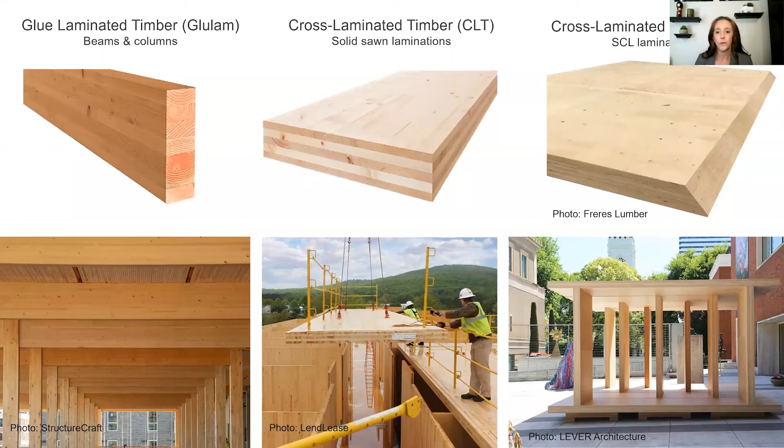So today, I'm here to discuss with you the mass timber revolution. So mass timber is a very old concept that has become new again with the advent of technology and modern design practices and code changes. For those of you who are unfamiliar with what mass timber is, I'll just go over it very quickly. So glue laminated timber, many of you are probably familiar with. You may have this in your own home, or it has been in the roof of residences or commercial facilities that you've been in. So it is essentially dimensional lumber laminated together in the form of beams and columns.

Cross-laminated timber is the buzzword lately, and it is also 2x dimensional lumber laid out in sheets and laminated together with glue, and each layer is perpendicular to the next layer, and this allows for strength and structural stability. Another form of cross-laminated timber can come by utilizing wood veneers. So mass plywood panels is an example of this, where you take essentially what looks like very large plywood and secondary laminating them together, also adding to the strength and structural stability. So when we talk mass timber, think very large pieces of wood.

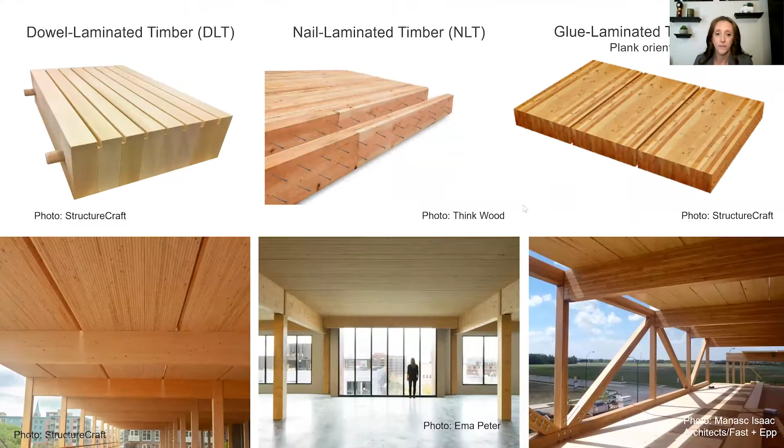Dowel laminated timber is dimensional lumber laid on its side and held together with hardwood dowels. This is often done in the factory and comes out as a finished product. Nail laminated timber is probably the very original mass timber and the very original dowel laminated timber. It is essentially dimensional lumber laid on its side and held together with mechanical fasteners such as nails. This can be done in the factory or on site. Glue laminated timber is a larger version of the glulam beam and column laid on its side and can be utilized for floor and roof decks.

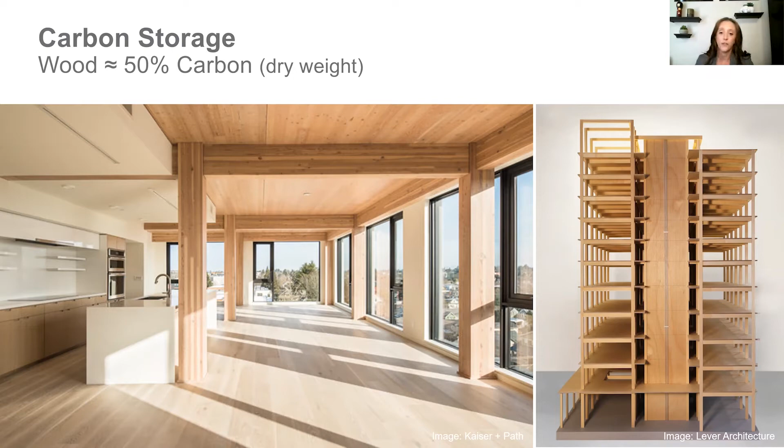Trees, yes, trees. Exposing wood can connect us with the trees from which they are sourced. After we've all been in quarantine and had a very interesting year, much of which might have been spent indoors, we are all thinking about biophilic design and how we can bring the outdoors inside. There are a tremendous amount of benefits to using wood in biophilic design.

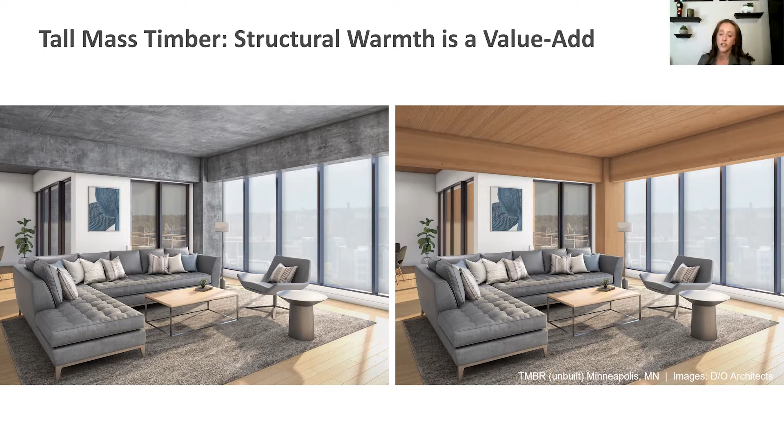As you can see here, exposing the timber as both the structure and the finish is a feature that many developers, occupants, and design teams are attracted to. It provides a warmth of structure that does not otherwise exist with other building materials.

Labor availability and labor shortages have plagued the construction industry for years. Mass timber projects regularly see significant reduction in the size of the crews needed to install these projects. That can help with some of the challenges projects face and make a project in timber definitely more feasible.

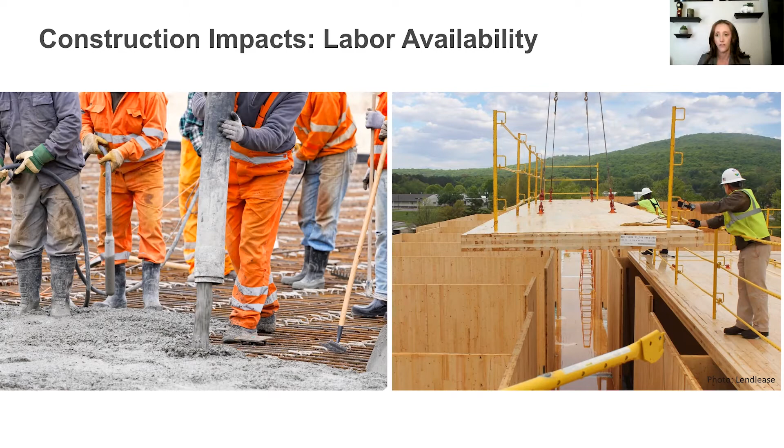Here's a screenshot of a schedule study that was done on a 12-story mass timber tower in Seattle. So it was determined that building this tower in mass timber would shave 5 months off the construction schedule as compared to the same building built in post-tension concrete. So we regularly hear that there is a 25% schedule savings that is realized across the board on mass timber projects.

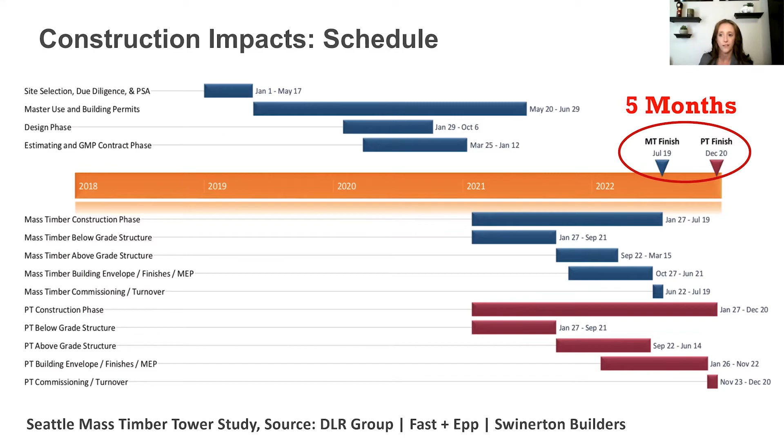So facilitating growth, how can we ramp up the adoption and acceptance of mass timber? So it starts with education and changes to the building code. So the International Code Council issues a new building code every 3 years. So the current building code is the 2018 building code. Many jurisdictions and states have not yet adopted that version.

For example, Idaho is largely using the 2015 International Building Code, but that is okay because mass timber was officially recognized in the 2015 International Building Code as a structural building material. However, come 2021, there are some exciting changes with regard to wood and mass timber specifically. So in the 2021 International Building Code, they're going to be incorporating some tall wood provisions.

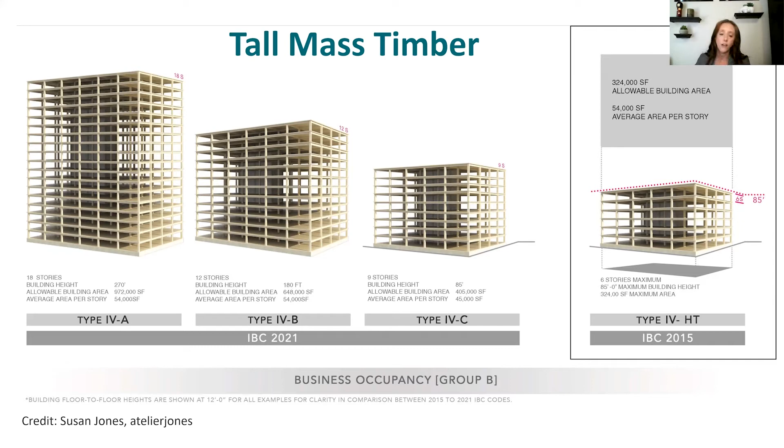And what this does: wood is currently only allowed to be utilized in a structure up to 6 stories in height. So in 2021, wood, specifically mass timber, will be allowed to go into buildings all the way up to 18 stories. So it is broken down into 4 different types. And with each step of the way, there are code provisions that will have to be adhered to. And a lot of that would have to do with how much of the wood can be left exposed.

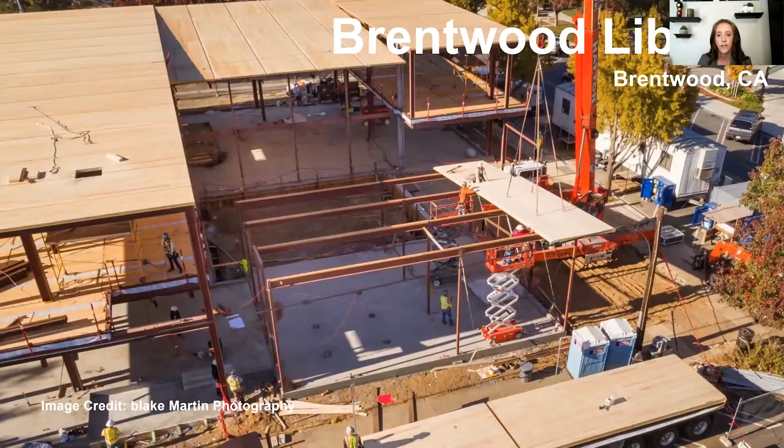Here's another library. This is located in Brentwood, California, and it is a 2-story library where they used CLT in the floor and the roof. And there's actually a second building on the campus, a 1-story auxiliary building where CLT was used in the roof as well. And one thing I'd like to point out is that this was the second project utilizing mass timber for this design team. And they only used CLT in the roof of their first project.

And what we're hearing a lot is that design and construction teams tend to dip their toe in the water with regard to utilizing mass timber. But once they've done it, they're eager to incorporate it again and more of it in subsequent projects. They find the material both fun and versatile and easy to work with.

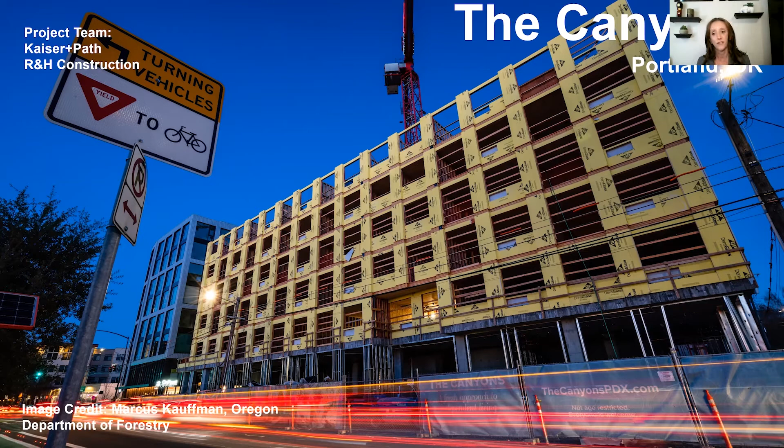This is the Canyons, a 70-unit apartment building in Portland, Oregon. It is 4 stories of wood over 2 stories of podium construction, and this project is currently under construction. This is a unique project because it has an emphasis on senior living. The goal is to be 100% ADA accessible in a downtown urban living environment.

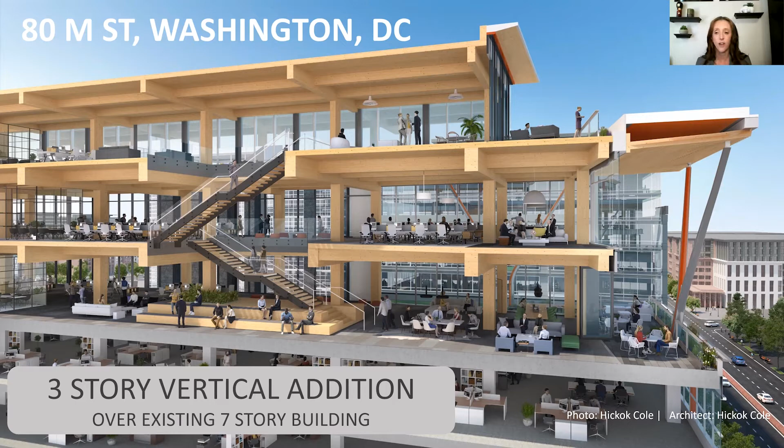This is also a very unique project. So one of the benefits of mass timber is it's relatively light in weight as compared to other building materials. So sometimes when you must expand, you must go up. So here is a building in Washington, D.C., of which they have added 3 stories of mass timber construction on top of an existing 7-story concrete building. So this is currently under construction.

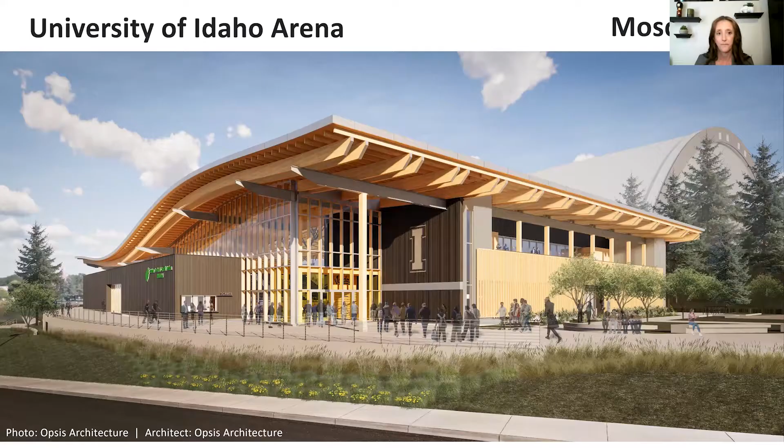This project, you might all be familiar with, is the University of Idaho Arena right here in Moscow, Idaho. And I won't go into too much detail on this project. Dennis Becker is joining us and he'll go in great detail. So this project is a 66,000 square foot arena that will finish construction in the summer of this year, and it is currently well under construction.

So with that, I want to thank you for your time, and I'll turn it over to Dennis to talk more about the University of Idaho Arena.

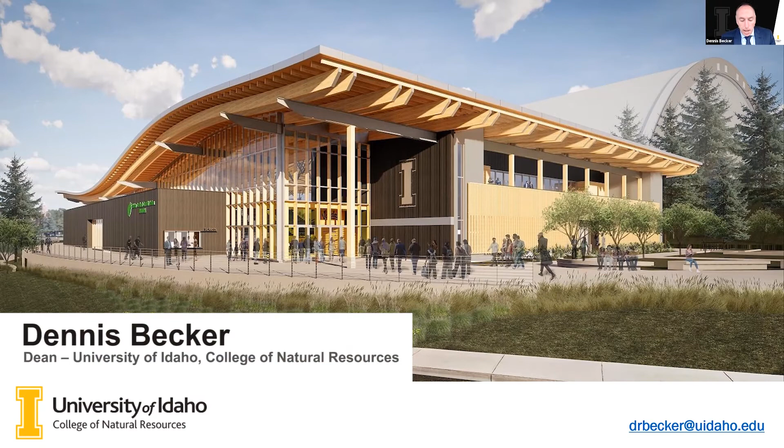My name is Dennis Becker. I'm Dean of the College of Natural Resources at the University of Idaho. As the land-grant institution of the state, our mission is to educate, conduct research, and provide outreach to the citizens of Idaho. We take that responsibility very seriously, and a bold demonstration of that mission is the Idaho Central Credit Union Arena being constructed on the Moscow campus.

The ICCU Arena represents an application of mass timber in a uniquely Idaho way that builds partnerships and increases the ROI for Idaho through student training and public education. People said we couldn't build this type of facility. They said it would be too expensive and that we lacked the expertise and workforce in Idaho to accomplish this.

Well, in the spring of 2019, ICCU President Kent Oram and U.S. Forest Service Chief Vicki Christiansen joined me in breaking ground for a truly inspirational project that invested in Idaho companies, Idaho workers using sustainable Idaho wood. The U.S. Forest Service provided seed funding for initial design and building code review, and the Idaho Central Credit Union bought the naming rights. Today, we're just a few short months away from completing construction on the ICCU arena.

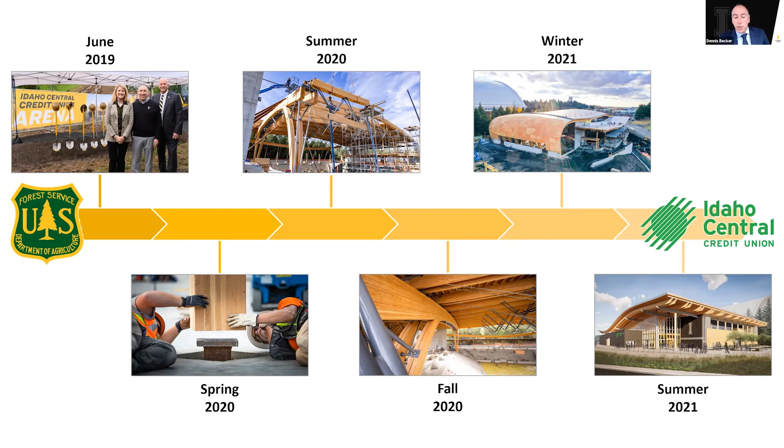Utilities and groundwork took about a year to complete, and this past spring, we set the first wood beam. From there, roof structure, walls, basketball courts, locker rooms were quickly constructed. And as we sit here today, the outside wrapping of dark cedar siding is being installed. Most of the building structure was completed in just one season, speaking to one of the benefits of mass timber. We are on schedule to complete construction this summer at a cost-competitive rate with traditional construction.

The ICCU arena was made possible through generous contributions of donors, student activity fees, and our strong relationship with the forest products industry in Idaho, which I would like to highlight. Douglas fir and larch were sustainably harvested from the University of Idaho experimental forests and surrounding public and private lands. The College of Natural Resources students planned and laid out timber sales on our forest.

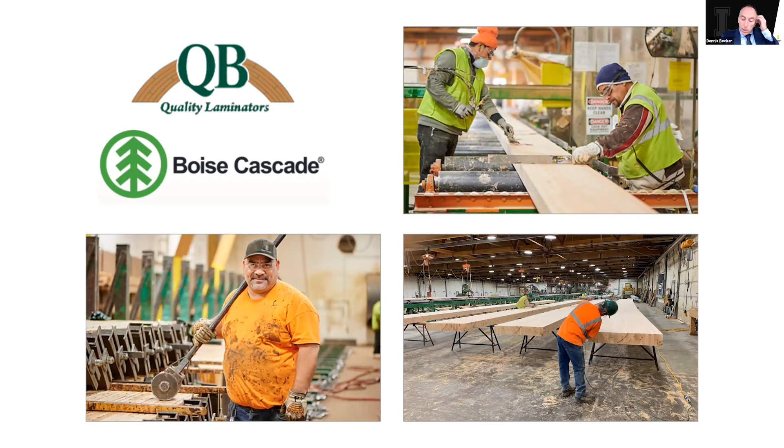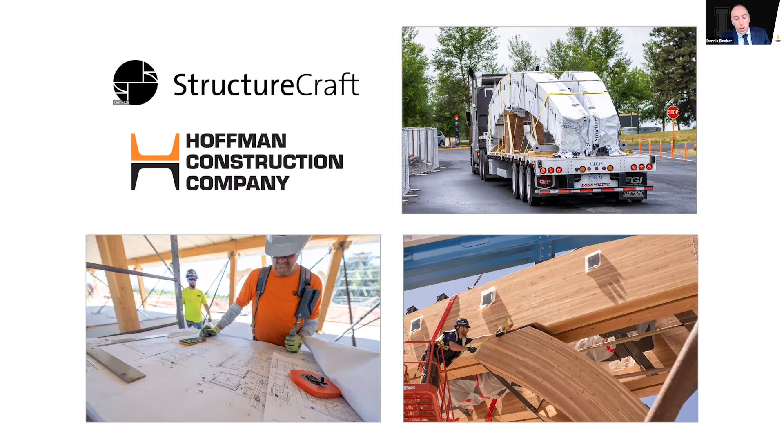We worked with our student logging crew, and Mark Swanson Logging in Orofino, who transported the logs to Idaho Forest Group in Lewiston and Bennett Lumber in Princeton. From there, it was processed into lamstock, and it was shipped to Boise Cascade in Homedale and QB Laminators in Salmon. Employees in these two Idaho companies processed the lamstock into glulam beams, which were machined by StructureCraft in British Columbia and assembled on site by StructureCraft and Hoffman Construction employees, many of which are Idaho companies.

The wood paneling for the roof was donated by PotlatchDeltic and St. Mary's, and the cedar siding being installed today was donated by the Idaho Forest Group and Tri-Pro Cedar Products in Old Town, Idaho.

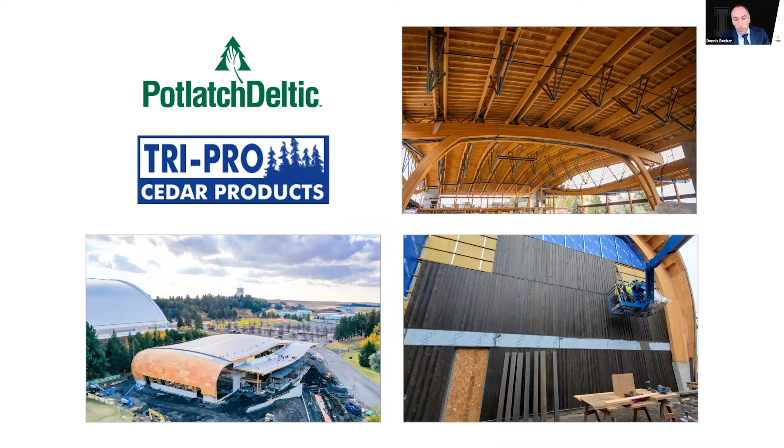KPFF Consulting Engineers in Boise were the principal engineers, and University of Idaho alum Chris Roberts with Opsis Architecture was the lead designer. So as you can see, the ICCU arena is truly an Idaho product made by Idahoans with sustainably harvested wood from Idaho forest by the University of Idaho.

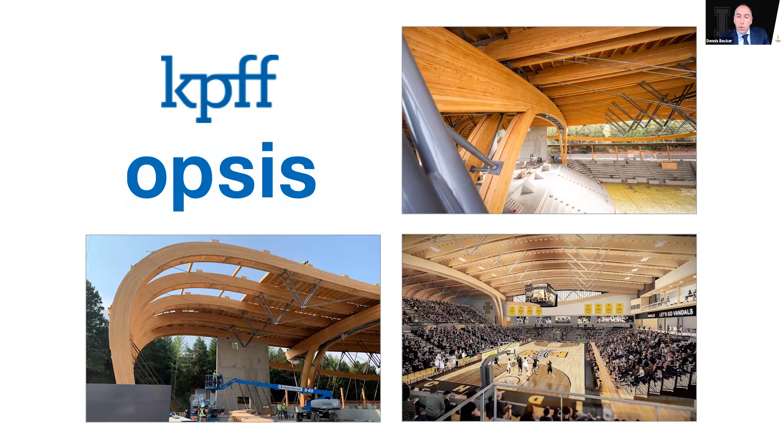Why is this important? Well, for every 1 million board feet of timber harvested in Idaho, 24 direct and indirect jobs are created. Those are jobs in your communities. The more we can do to promote mass timber construction, the more it helps Idaho's economy.

To put that in perspective, I need to give you a quick overview of mass timber markets. First, demand for mass timber in the U.S. will be dominated by California and large West Coast cities. Some construction will happen in Idaho, just like our ICCU arena, but our opportunity is on the manufacturing side. Quality wood is needed to manufacture CLT and glulam beams, which will largely be derived from Pacific Northwest and Canadian forests because of the quality of our forests.

Our main competition is Canadian softwood lumber from the interior of British Columbia. Tariffs do currently exist on softwood lumber entering the U.S., but not on finished products like CLT, which could push manufacturing expansion in British Columbia as opposed to Idaho. That said, existing production in the US and Canada is insufficient to meet projected demand over the next decade. And so there is an opportunity for Idaho companies to capture market share because we have high quality lumber and because of our expansive forest managed in a sustainable manner.

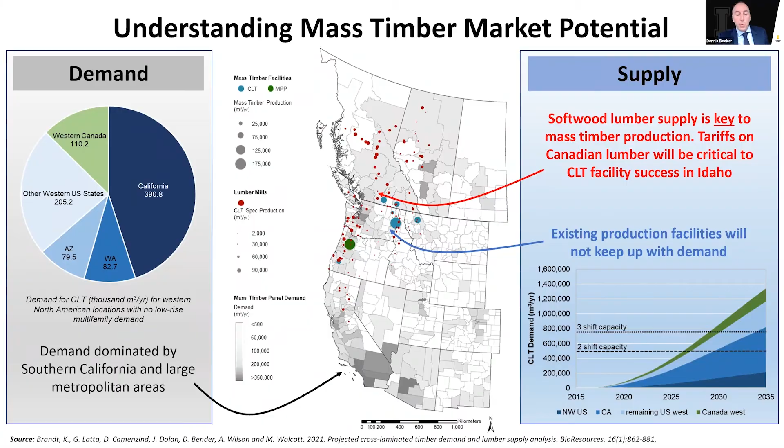Preference for using mass timber in commercial construction in Idaho is one important component for expanding mass timber markets, but so too is policy to ensure Idaho companies and forest landowners remain competitive. To that end, the College of Natural Resources is working with the Sustainable Forestry Initiative and our industry partners to tell our story and to promote the benefits of mass timber.

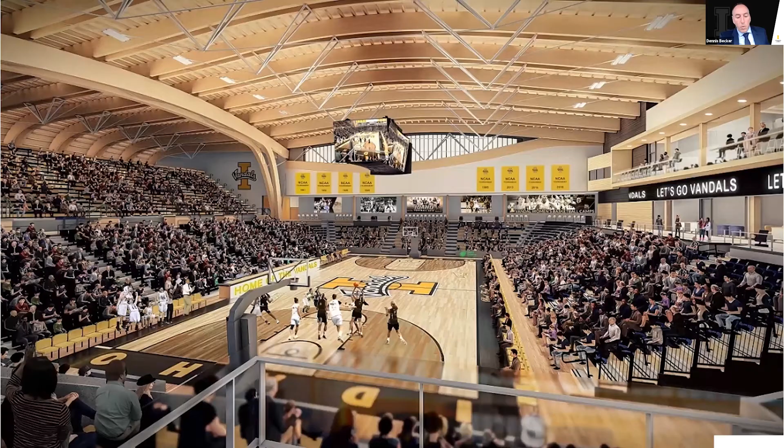So let's think about that story and how it could play out in your communities in the different parts of the state. Imagine yourself walking through the doors of the ICCU arena to the sound of the University of Idaho marching band. Those of you who are Vandals are already singing the fight song in your head, I'm sure. You're running your hands along the charcoal-stained cedar siding at the main entrance. You can smell the wood. You're watching a Vandals basketball game, or maybe you're listening to the cool sounds of a saxophone during the famous

Lionel Hampton Jazz Festival. Now imagine yourself taking a picture of your daughter or your grandson at graduation under the 20-foot I logo on the front of the building. She's smiling back at you and thinking how proud she is to have graduated from the University of Idaho.

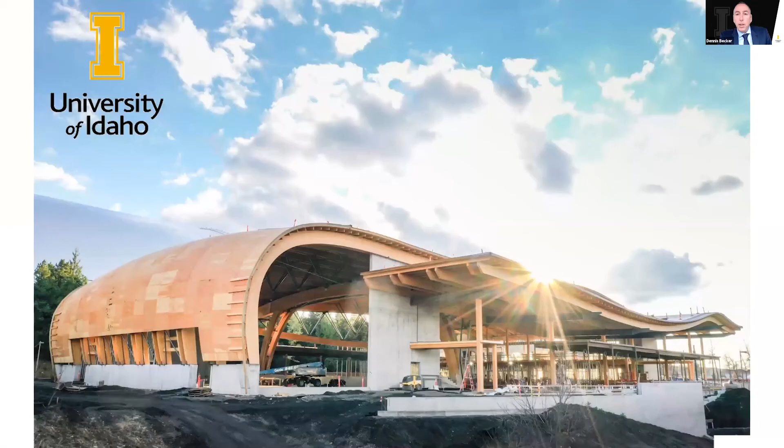This is a place for sports and events, but it's also a place for learning. It's a place to learn about engineering and architectural design, to learn about the chemical properties and adhesives used in wood bonding. It's a place to learn about sustainable forest management, and it's a place to train the leaders of tomorrow. So I hope you will join me this fall when we open the arena to watch a basketball game, experience the excitement of graduation day, or listen to the cool sounds of jazz. Thank you.

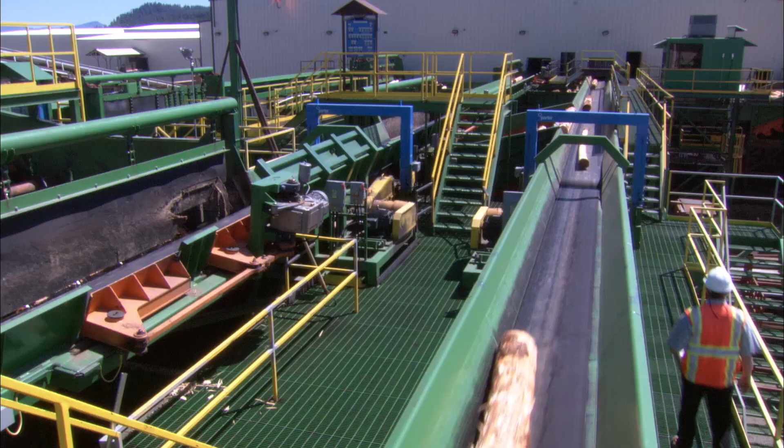I'm John Reiling, Chair for the Intermountain Section of the Society of American Foresters. As a mid-career forester in Idaho, I see a lot of challenges in our future for managing Idaho's forests and growing population. But I also see a lot of opportunities. The industry is strong with over a century of proven trust, providing sustainable products and economic contributions, including stable jobs and livable wages for Idahoans.

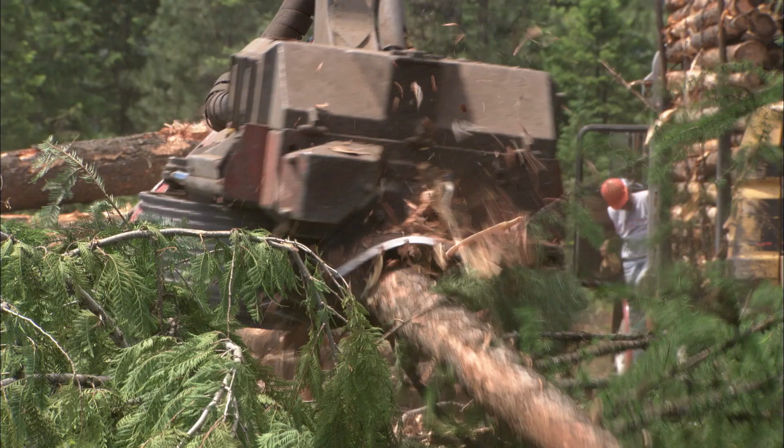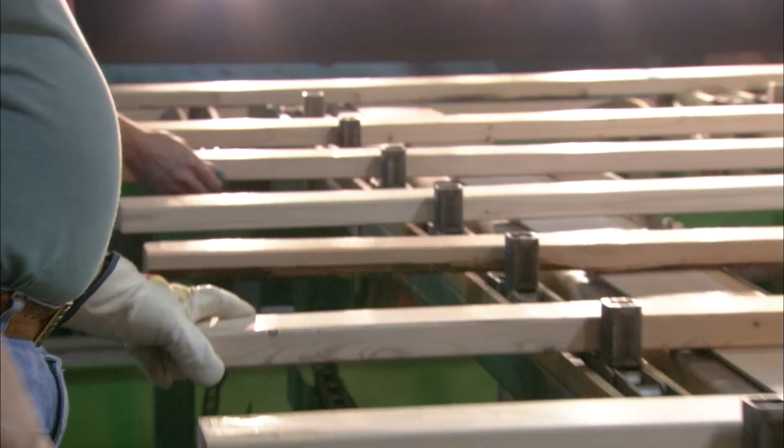Projects like the U of I Arena demonstrate a beautiful collaboration and the multifaceted benefit of Idahoans working together, utilizing Idaho's natural resources. There's growing opportunity for wood products to provide positive solutions to a growing population and subsequent structure needs, while benefiting ecosystem services and the climate. Passing legislation that helps to expand mass timber markets in Idaho and capturing market share is a key part of the solution. Embracing the use of sustainably harvested timber is healthy for Idaho, Idahoans, and our planet.